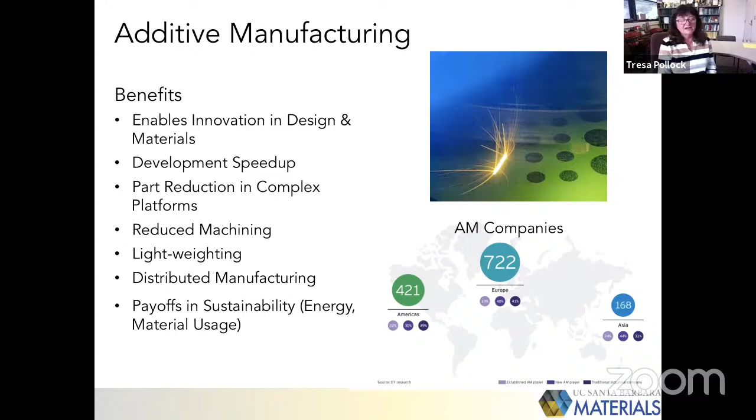So I'm sure that everyone has paid attention to some degree to additive manufacturing in the past few years. And there are many benefits to it, potential benefits, with regard to design, development speed up, part reduction, and the ability to print complex things, less machining, lightweighting, manufacturing. And I think importantly, given the environment that we live in now, sustainability.

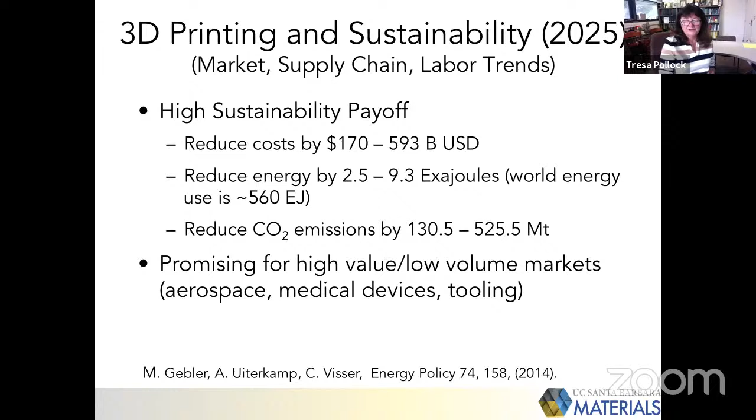And so there are some very interesting studies on sustainability of additive manufacturing emerging, and the numbers are interesting and rather large from the point of view of cost reduction and potential energy reduction for using these sorts of techniques for producing materials. Obviously, also CO2 emissions go with that. And if you read some of the literature, what seems to be emerging is that these approaches for metallic materials are promising for high value, low volume markets. And certainly aerospace would be one of the places where it could have high payoff.

But on the other hand, if you look at the state of 3D printing and where people are producing industrial products, you see that aerospace actually is currently a rather small slice of the total business. And of course, the reason for that is safety related, that when we print things that are going to fly in critical applications, it's absolutely essential that we understand everything about the structure as well as the defects that arise in the printing process.

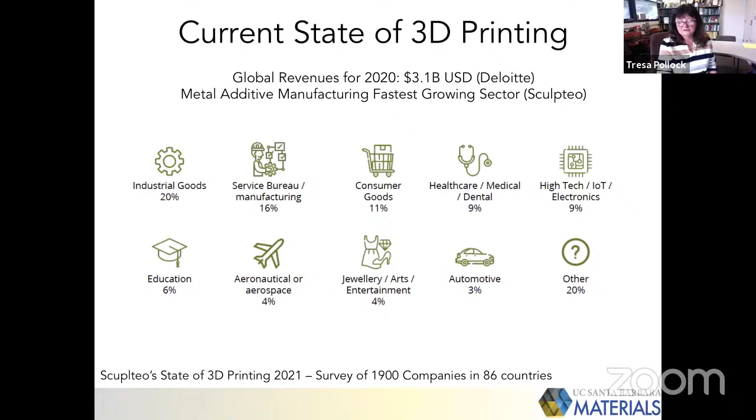The other challenge with regard to aerospace, as well as other sectors of industry, is this business of the selection of materials available in powder form if we're going to print from powders. And there are something like 5,500 well-known alloys that are used in common industrial applications. But if you go, for example, to the GE webpage and look at the selection of materials available to be purchased in the form of powders, you see a rather short list.

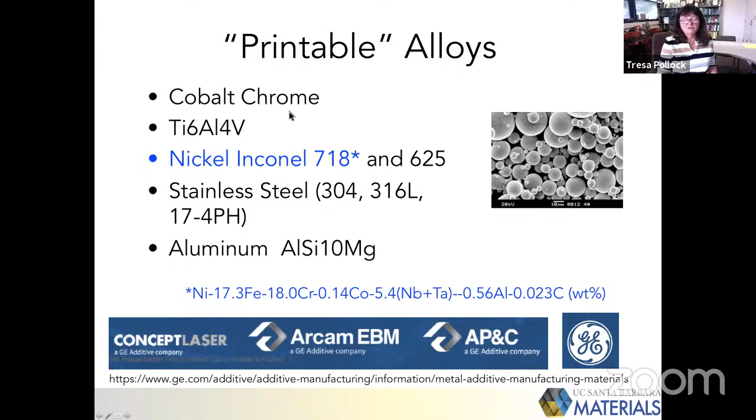So there's cobalt chrome, and this is the alloy that GE has used to make their fuel injectors that are currently in service. One can get titanium, a couple nickel alloys, stainless steel, and aluminum casting alloys. But in fact, the selection is rather limited. And so one of the challenges is to develop alloys that are tailored to this process.

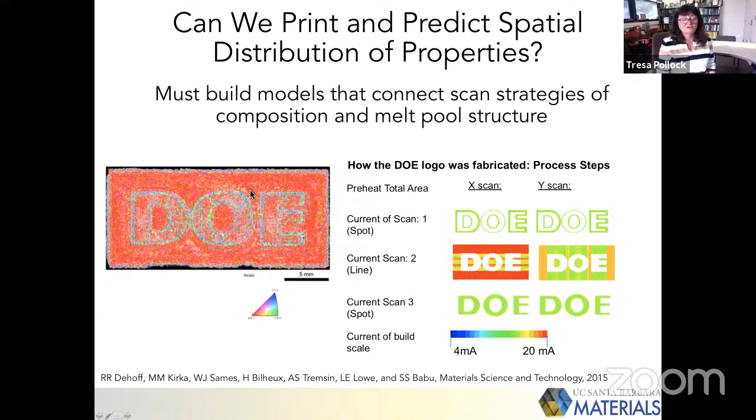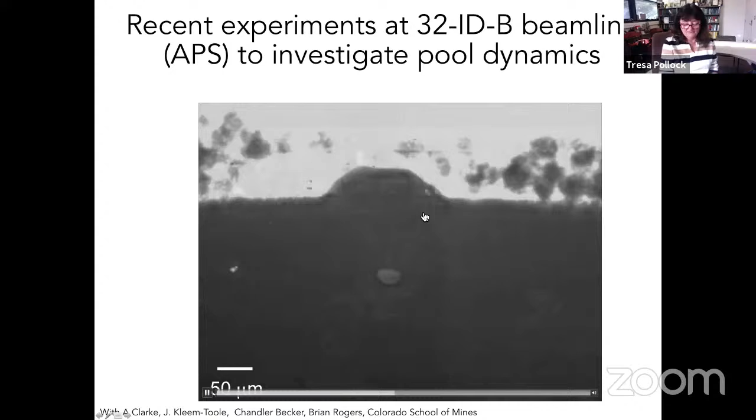And in looking at this movie, it's quite obvious that this is a very complicated process to control from the point of view of where physically all the powders are and what goes on in the liquid, and understanding how to control that over very large volumes. And so really what one has to pay a tremendous amount of attention to is what happens in this melt pool at the point where either a laser beam or an electron beam interacts with the material.

So today I will focus on both laser powder bed and electron beam melting, and neglect other processes such as wire additive manufacturing, for example. So in both the laser and electron beam processes, you have this melt pool that's maybe a few hundreds of microns in extent, in width and depth. And what are all the things that you have to worry about?

Well, there's the nucleation of solid from the liquid phase and the formation of the grain structure. One has to worry about the gradients and velocities at which these interfaces are moving, the degree to which you remelt material below when you scan the beam across, the potential for cracking, residual stresses, lack of fusion, what happens to that powder, and how much of the material is vaporized. And so what we've been trying to do is really understand a lot of these details at the scale of the melt pool. And so this is sort of at the scale of cubic millimeters.

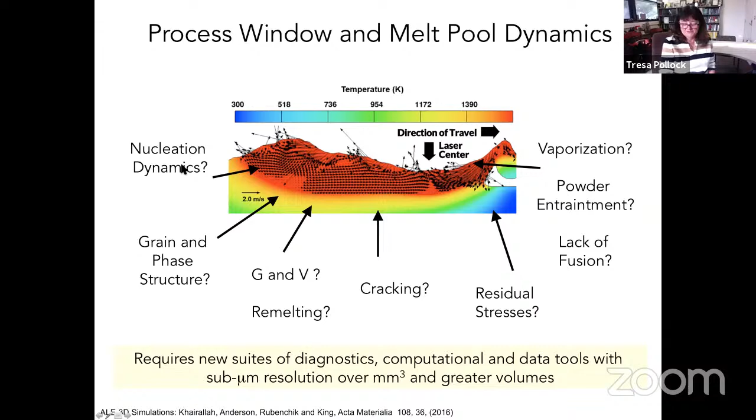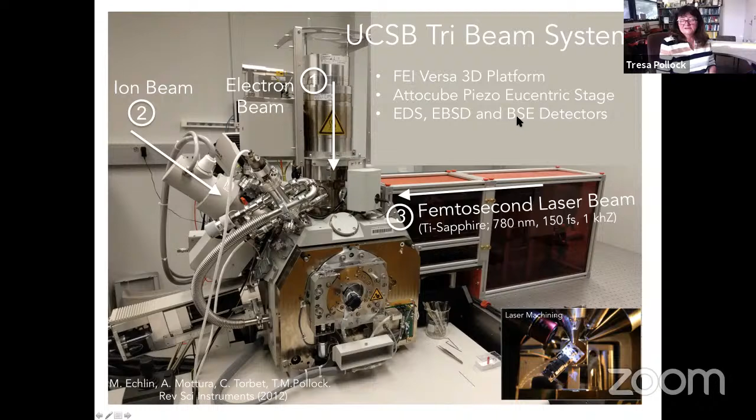And this is a femtosecond laser. And I'll explain in a minute why it's important that we use femtosecond lasers for this sort of thing. And so this is what it looks like inside the microscope. So you can see the laser beam coming in here and all the other EBSD and electron columns here. And so the motivation for doing this is to use the femtosecond laser to remove material layer by layer so that we can get 3D data, both chemical and structural, by using these other detectors, EDS, EBSD for crystal structure, and backscatter imaging for structure itself.

And so the way that we do this, okay, I think that's all right.

So we basically deposit the radiation. In the short term, nothing but electrons interact with the system. And then in a matter of maybe nanoseconds, a liquid-like layer comes off. And because this whole process takes nanoseconds, by the time this layer is coming off the material, the beam is off. And so what that means is that you're no longer putting energy into this layer.

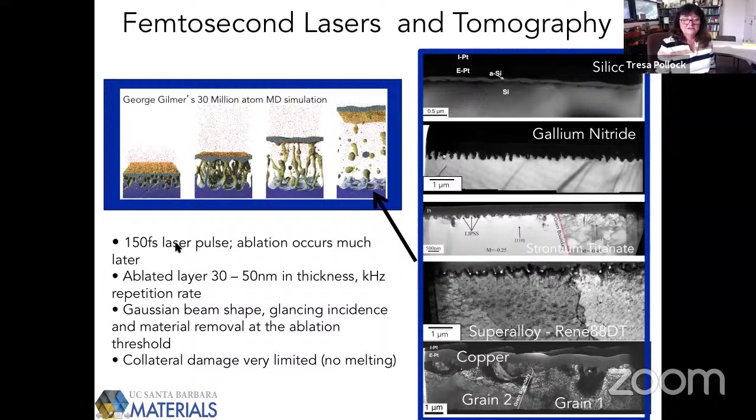Now I'm stuck. Let's see. Oh, there we go. Sorry about that.

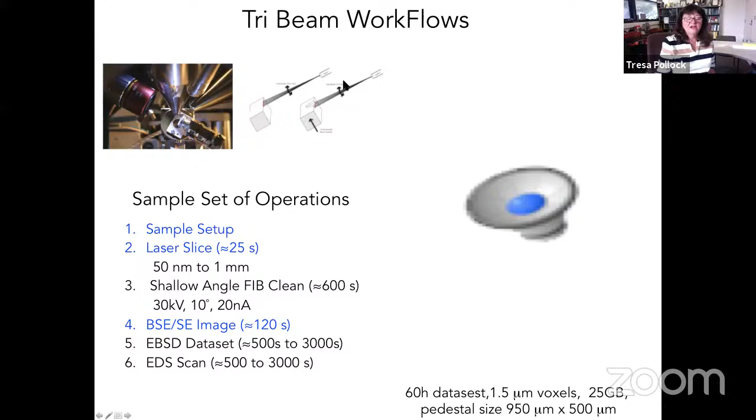So this setup shows the sample in the microscope. And as I said, we go at glancing incidence. And so this is really just an example about workflow. So you can see a sample here that's been 3D printed. And this data set that you're seeing layer by layer here has been collected over 60 hours. There's 25 gigabytes worth of information here. And each slice takes only 25 seconds. So the femtosecond lasers are very effective for speeding up the process of developing a 3D data set.

In some cases, we may use the focused ion beam to slightly clean up the surface and knock off some of those periodic structures that I showed you at the surface. And then depending on what kind of information you want in each layer, one must commit varying amounts of time to gathering that data. And so as you can see here, we make a pedestal and then we remove the material layer by layer. And so this particular data set is something like almost 1 millimeter by 1/2 millimeter.

For some reason, my computer is not wishing to advance the slides.

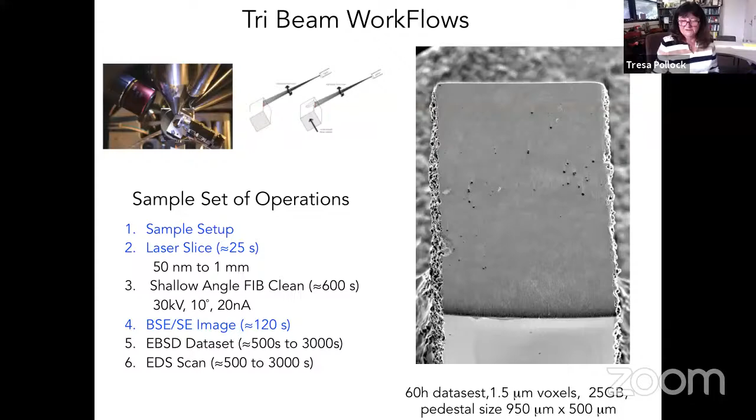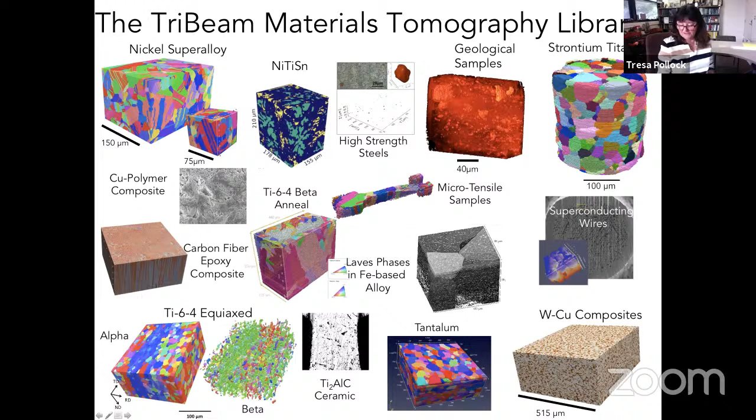Now, as I said, we're gathering a lot of data here, and it turns out additive manufacturing on many fronts is really a data problem. And so what you can see here is that you gather these different modalities of data, and there are big chunks of data that one stores. And the biggest part of that is the electron backscattered patterns that give you the grain orientations. Now, another challenge with regard to using different sorts of detectors is that they all have different distortions. And so one has to find corrections and approaches to merging the data into these 3D data sets.

I'll show you a series of 3D data sets, but I do want to emphasize for those of you who are interested in tomography that there's many phases to getting the data into useful form. And so acquisition's just the first phase. And I've shown you this tri-beam approach. There are, of course, many other approaches like X-ray tomography.

And once one gets the raw data, then there's a lot of things that you have to do to bring it together. So in particular, we use a lot of dictionary or spherical harmonics indexing. These techniques have been developed by Marc De Graef at Carnegie Mellon. We have some machine learning approaches that allow us to bring data sets into the same frame of reference. And then that's not the end of the day. You still have to develop a lot of techniques to actually analyze the data. And so things, for example, that we can get from some of the data sets that we're gathering include geometrically necessary dislocations. So we can have the full tensor because we have a 3D EBSD data set.

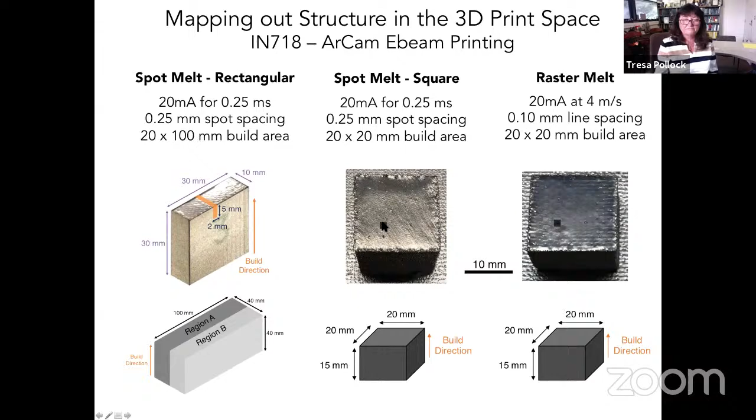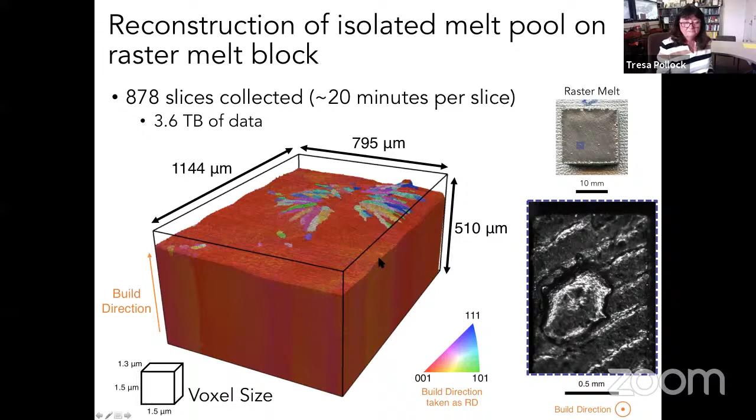And so given that we can very clearly define where that melt pool boundary was from the sections, we can now actually separate the entire melt pool from the rest of the structure. And so again, you see that all of the red grains have grown up from beneath due to remelting. And then we have all these grains on the surface which have nucleated independently.

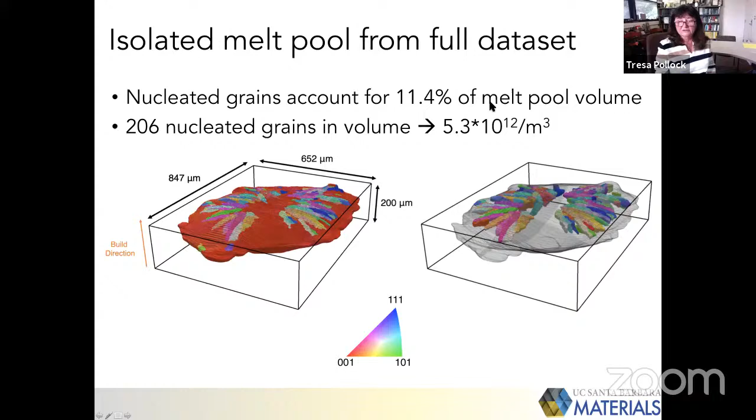And so what this allows us to do, since we have the volume here, is actually count the nucleated grain density. And so in this case, the new grains that have nucleated account for 11% of the volume. Now, why might we want that information? Well, because we want to be able to connect the processing parameters to the structure that develops.

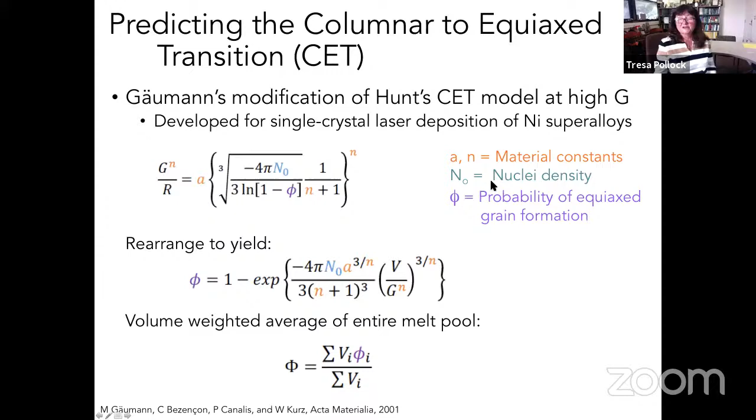And so if you study solidification, you know that the main parameters are the thermal gradients at the interface and the interface velocity. And there are models for how one transitions from that columnar to equiaxed structure. And all of these models require information about the density of nucleated grains and information on the material itself. But the missing information in many of the models that have been applied to additive manufacturing is this nucleation density. And so we're able to use that information now to build models to predict structure.

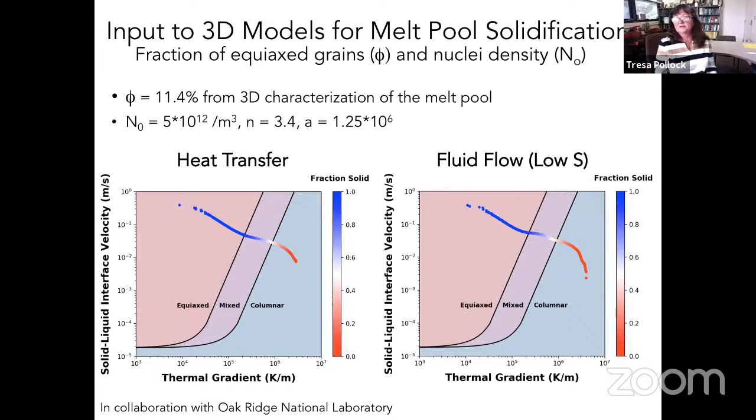Is this blocking everything? Sorry. So definitely where Waldo was hiding.

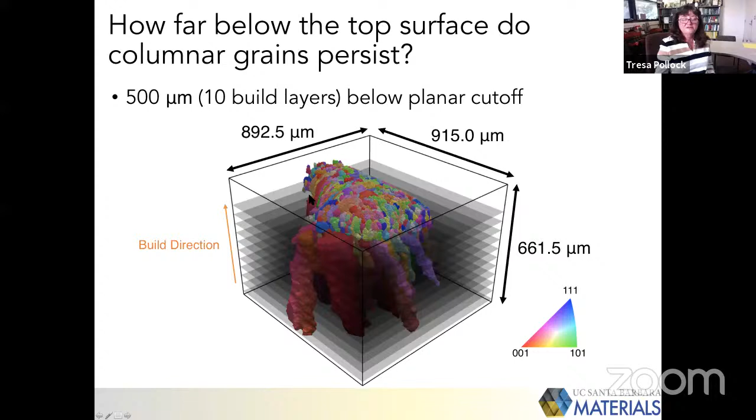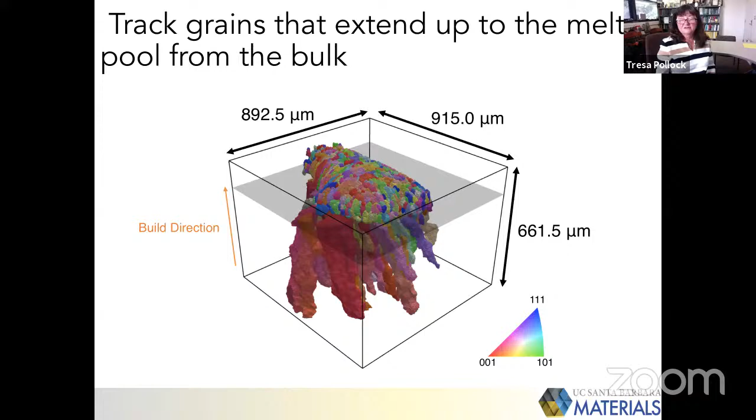Okay, so here now we have this spot, and you can see that the conditions in the melt pool were completely different. And so again, we want to understand how this structure developed, and so we can track the grains back through the layers. So here is the top of the melt, and here are the grains that extend into the previous layer, into the previous layer, and so forth. And so one can basically track the development of these grains and understand the degree to which we have independent nucleation versus grains that persist from the layers below.

And so what you can see is that in this top layer, there are actually many grains that extend back 10 layers below the melt surface. And so this is one of the things that has to be included in the modeling. One cannot necessarily just on the fly change the structure because there's all this history from the layers below you.

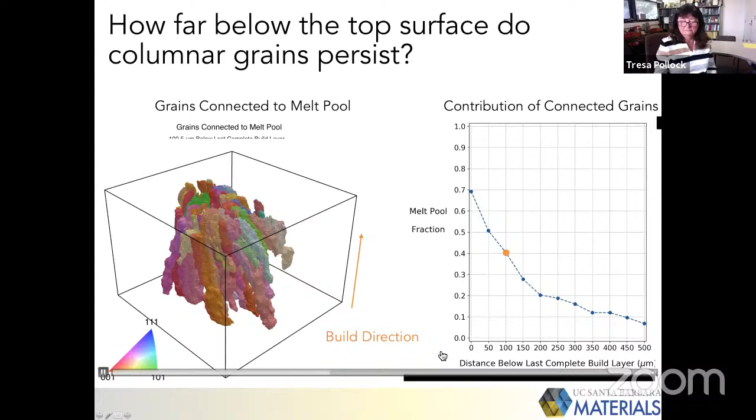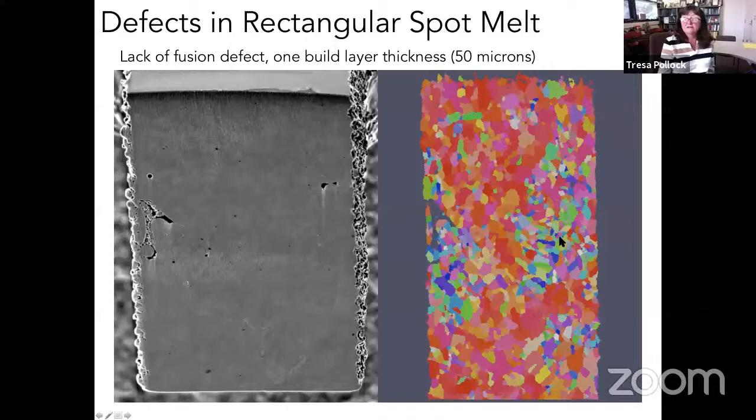Okay, this is just another example of things that one can find in 3D associated with the process. And this is one of the real challenges for using these materials in aerospace. So as we section through the material, you can see obviously there's a defect of some sort here. And if you look at the grain structure here, what you'll notice is that these defects seem to be associated with grains that have different orientations from the surrounding material.

And so if you take the 3D data set and look at this lack of fusion defect, you can clearly see the size of it here. But what you learn from looking at the 3D data is that, okay, there's some disturbance in the build process, and that results in lack of fusion and a void here, but that defect actually extends well beyond the moment where it was created because it requires grains to renucleate as equiaxed grains in this background of columnar structure.

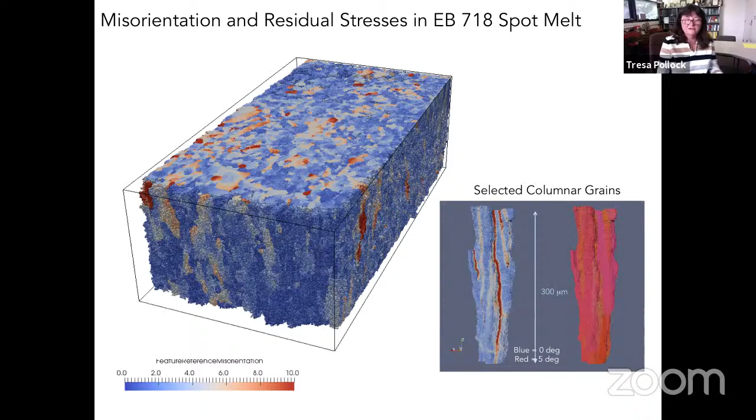But the important point is that these misorientations are not uniformly distributed in the structure, and that if one tracks individual grains as they solidify, there is some tendency for the misorientation to build up in the regions where we have the final solidification event. And so again, controlling the gradients and velocities strongly influences that.

And so just to put in perspective that 10 degree misorientation, here is a couple of different materials. Here's the 718 that we've been working on. When you get something of the order of 8 to 10 degrees, you might expect a crack to start to develop while printing these materials. Here's another alloy, Mar-M 247, and you can see that there are cracks that have been developing throughout the build.

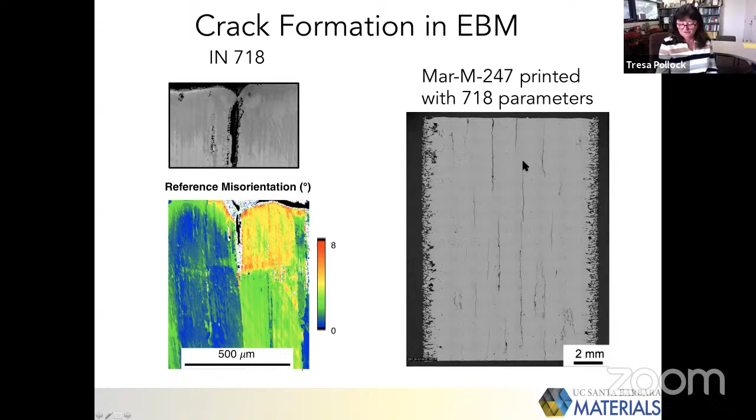Now, the challenge here is that Mar-M 247 is an example of an alloy which has very, very good high temperature properties. And so it would be a very desirable alloy for printing, but it's not really possible to print it without cracking. And so now we come to the question of, well, how are we going to make printable alloys that don't crack, but are strong enough to serve in these aerospace applications? And so a number of my students have been working on this problem in different ways.

One approach is to actually work with the powders themselves and try to go through processes where you functionalize the surface of the powders to enhance the nucleation process in the melt pool. And in doing that, you create finer grain structures, which have less tendency for cracking and hot tearing. And so this is quite useful for things like high strength aluminum alloys.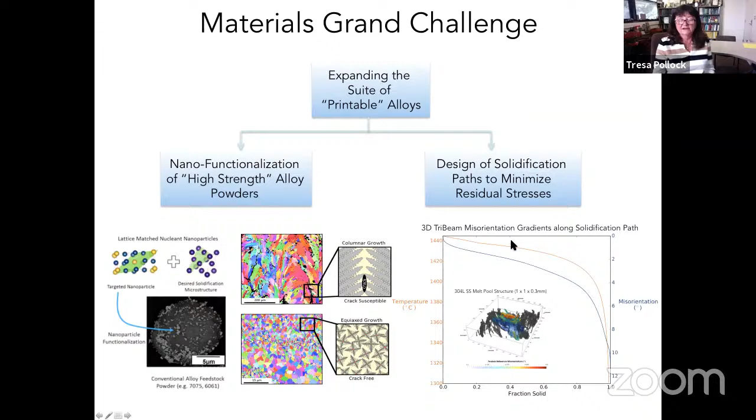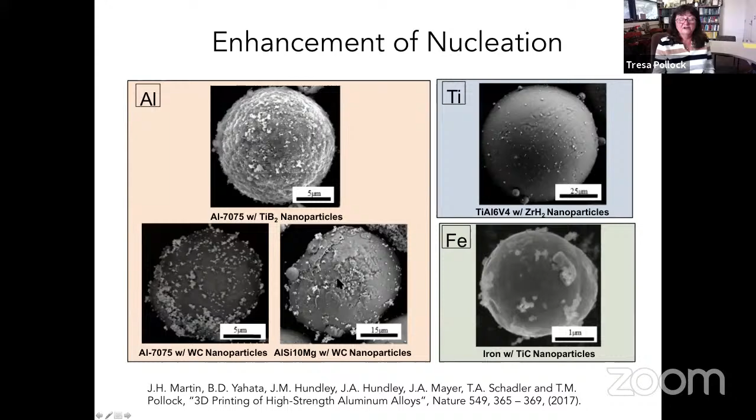On the other side of the house, where you, for example, do not want very fine grained structures, so for example, in high temperature applications, then it becomes necessary to really modify the solidification path by changing alloy composition. And so here's a close-up of the functionalized nanoparticles. If you'd like to read more about this, there's a paper. But in doing this functionalization, one is able to modify the nucleation events as this powder is melted.

Okay, so with regard to getting high strength alloys that can be printed with columnar grain structures without cracking, we've been working on a new class of materials, cobalt-based alloys. And I show here the structure of one of the early simple ones. And the motivation for this class of alloys is that they're two-phase. We have an FCC cobalt matrix and an L12 precipitate structure here, and the precipitates provide strengthening at high temperature.

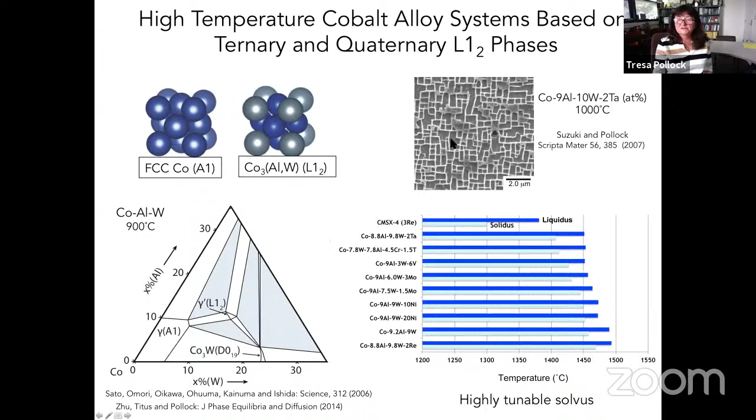These alloys look similar to current nickel-based superalloys, but have somewhat higher melting temperatures and very different properties with regard to solidification. And particularly important is they have a highly tunable solvus for these precipitates, so the temperature at which all the precipitates go into solution.

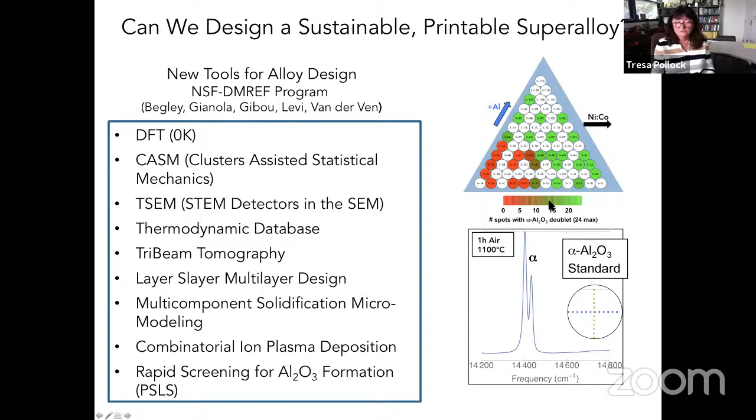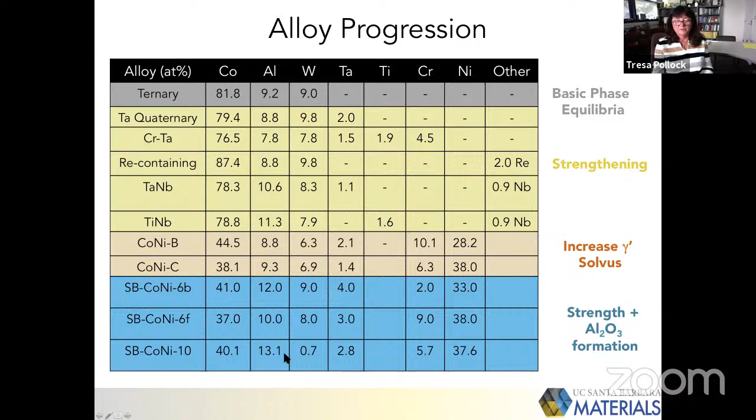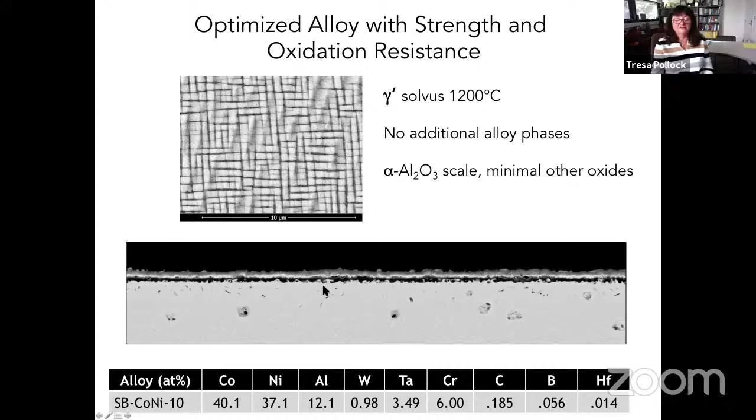And so bringing together all of these tools, we sort of went through a few generations of materials and then basically ended up with some alloys that are a near balance between cobalt and nickel. Here's the composition shown at the bottom, and then aluminum for formation of precipitates. And so with the combinatorial experiments, we end up at this final composition that I show at the bottom. You can see when this material is oxidized at 1100 C, there's a layer of alumina here. And we have a high volume fraction of precipitates up to 1200 C. So this means the solvus of the material is at 1200 C.

And I show this in comparison to a nickel-based single crystal superalloy. And so what you can see is that these alloys are similar in principle to superalloys that are currently flying in aircraft engines up to about 1100 C, and that they have a lower solvus compared to most nickel alloys. And this becomes very important to the printing process. They also have densities that are similar to existing nickel-based alloys. And here I show some data on creep properties. And so this cobalt nickel alloy demonstrates properties that are similar to first generation single crystal superalloys that currently fly as turbine blades.

One of the reasons for assembling all of these tools to try to do calculations on alloy compositions before we make powder is one of the major challenges of designing alloys for additive, because one must acquire powder. That means that you have a very expensive step in your design process, which involves atomization of the powder. And so one needs to assemble these tools to the degree possible and do those calculations prior to making the powders. So this is the alloy that I just showed you. And we did procure a batch of powder from Carpenter Technology, and basically separated it into size distributions appropriate for printing by electron beams and by laser powder bed.

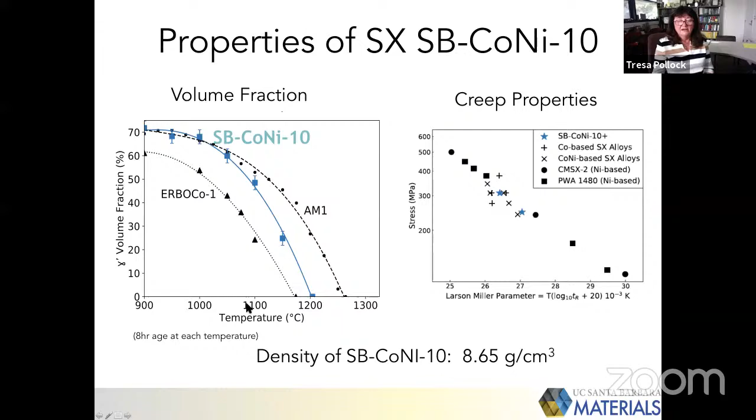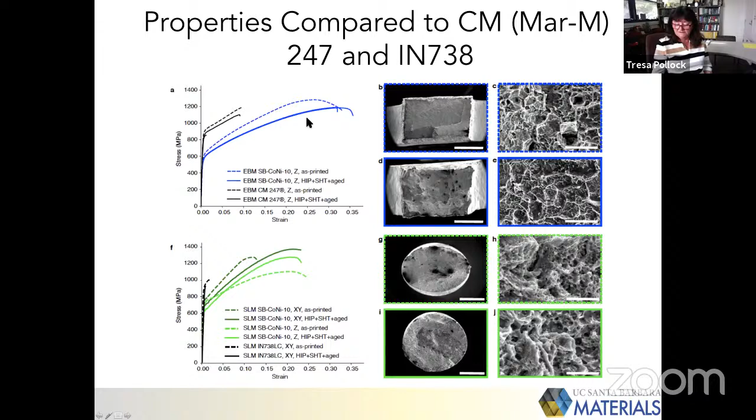And so our working hypothesis about why we're able to obtain these high ductilities in the as-printed conditions really comes back to the fact that we've controlled the solidification path such that we're able to avoid cracking in the liquid state, as well as in the subsequent cooling down through the solvus down to room temperature.

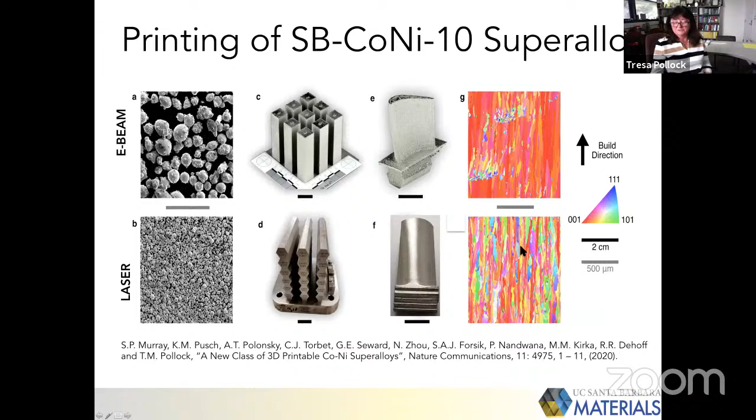Okay, so I think that's 9:45 California time. That means I should be wrapping up.

And so just to say a few general words, I think additive manufacturing does hold great promise for complex engineering components of the sort that are needed in aerospace. However, we still have a lot to learn about controlling the process. And if we can't control and predict structure, it's going to be hard to control and predict properties and achieve the same properties every time we print something.

We've been working on new metallic materials which match the unique aspects of this process. So the cobalt nickel alloy is an example of that. The powders which are functionalized are a different approach. But all of these things really come down to controlling structure and properties throughout the volume of the material that you're printing. And then finally, all the sensors, diagnostics, characterization are tremendously important, but we have a lot of big data problems, and certainly there are many interesting challenges on this front in the future.

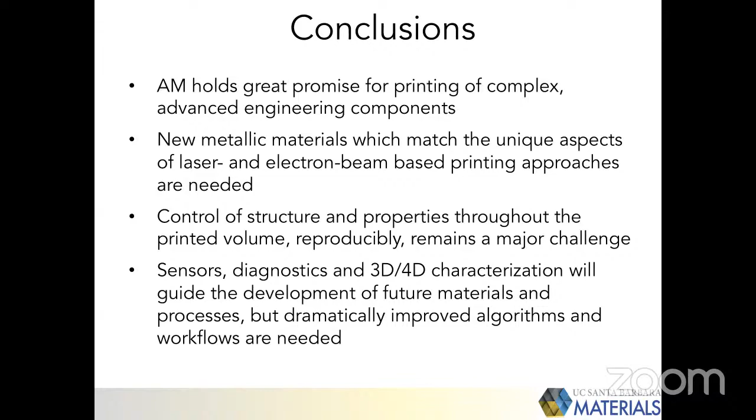Hi, Professor. Thank you for the talk. It's wonderful. I have two questions. The first question is that I saw the solidification partitioning coefficient. I was wondering, the table in that slide, the partitioning coefficient, is it calculated from the Scheil solidification on the top left, or is it measured from the grid on the SEM image?

So basically what we do is fit the Scheil equation to these curves. So if you measure the composition at the core of the dendrite, that's the very first solid to freeze. If you measure the composition in the interdendritic region, that's the last solid to freeze. And so we're just basically taking all of this data, ranking it high to low, and then fitting the Scheil equation to it. Oh, gotcha.

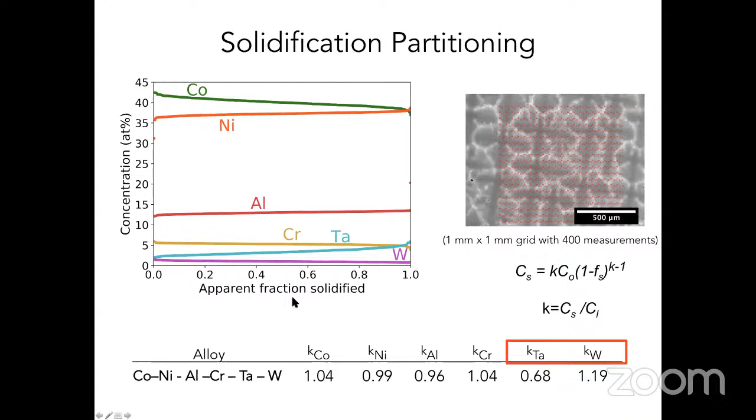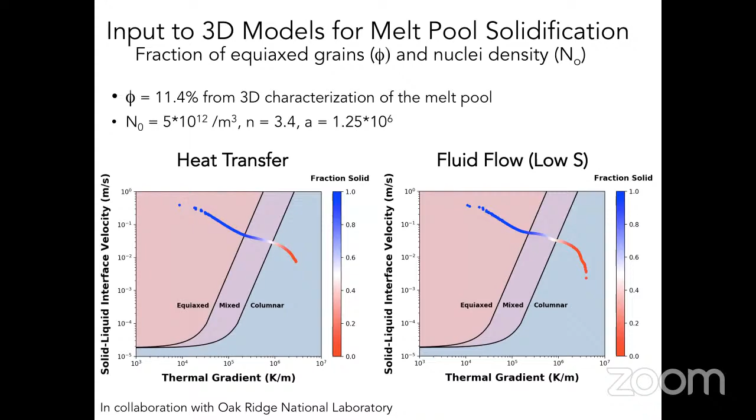Thank you, Professor. And the other question is, for the 3D EBSD texture measurement, what is the largest scale your equipment can do? I ask because we have noticed some interesting austenite grain refinement in our 3D printed martensitic steels. So I was wondering if we can try larger scale, several millimeter scale.

And in the commercial instrument, you can maybe get up to 2 by 2 millimeter size samples. I think the way their stages are set up and their lasers are set up is somewhat different. And so if you need data sets larger than that, you really have to do them sequentially.

The challenge, even with those big 2 by 2 millimeter data sets, really would be just the sheer amount of data that you end up with. Then it'd be very difficult to even process it because you need lots and lots of memory just to physically open the data sets and work on them. Got it. Thank you.